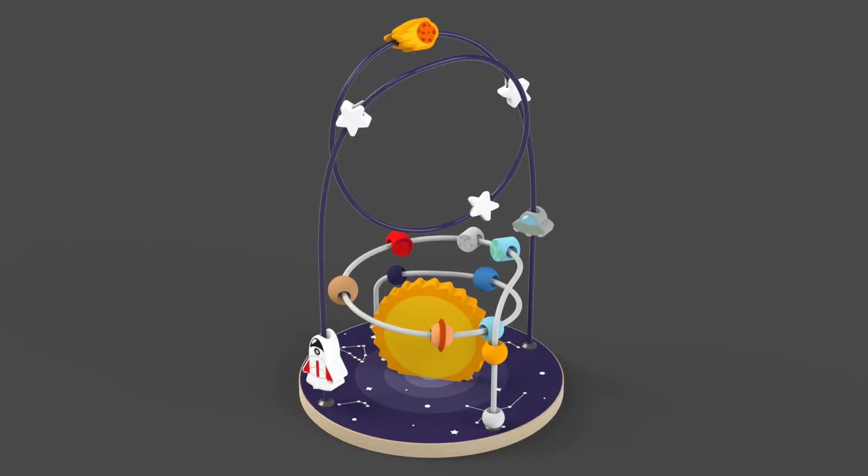In this video, we will be creating the first part of a space-themed wooden bead maze toy. You will be able to download the decals and the DXF files I am using in this tutorial from the description below. You could also design your own in a vector-based program or use imagery from the internet.

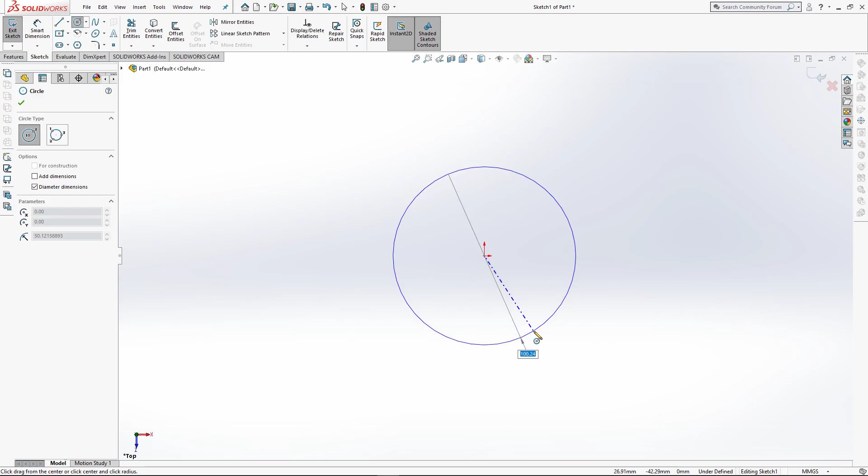To begin, click New and Part. Starting with the base, I extrude a 200mm circle to 12mm thick on the top plane. Then fillet the top and bottom faces by 1mm.

Now I'm going to start a sketch onto the top face of the extrusion. Using the centre square tool, I give myself 4 equal guide points. I then select the whole sketch and tick the For construction box, as I only want to use this sketch as a guide. Using the guide sketch, I draw 4 equal circles.

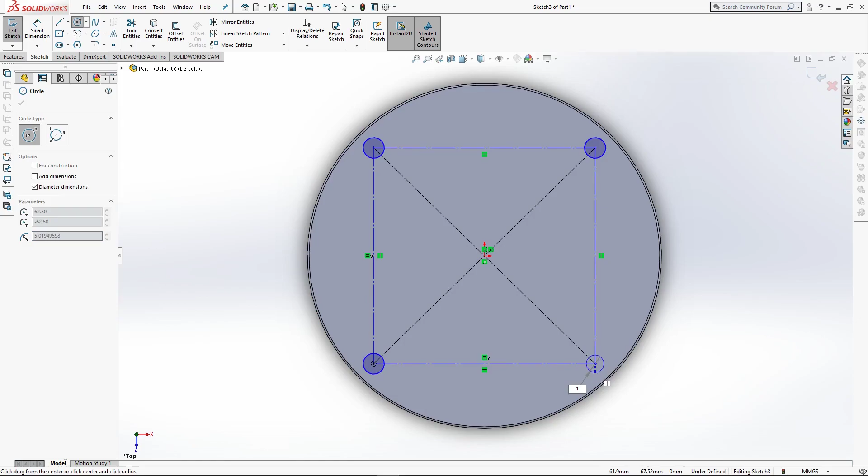I then want to extrude these to 3mm, unticking the merge result as I want these parts to be separate. I then want to chamfer each edge by 2mm at a 50-degree angle. I do this to all parts.

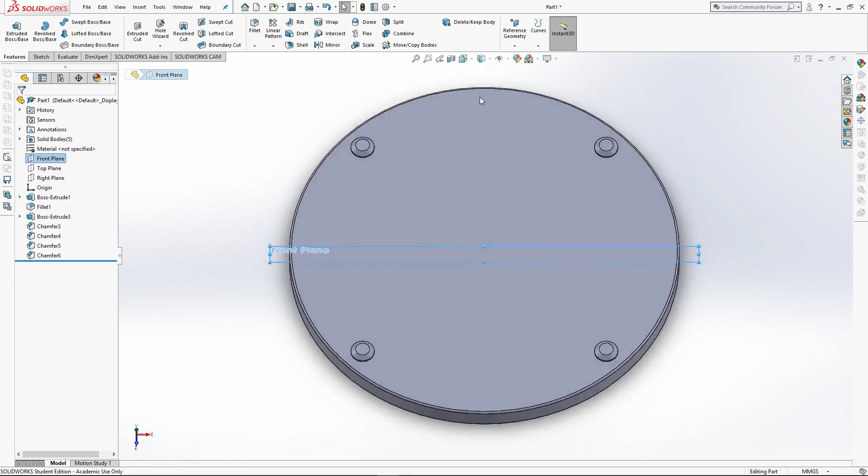I now want to import the DXF file for the sun, which will go in the centre of my bead maze. To do this, we click on the plane that we want to import the DXF onto. We then click Insert, DXF. From here, you want to select the DXF file and click Open. A dialog box will appear here.

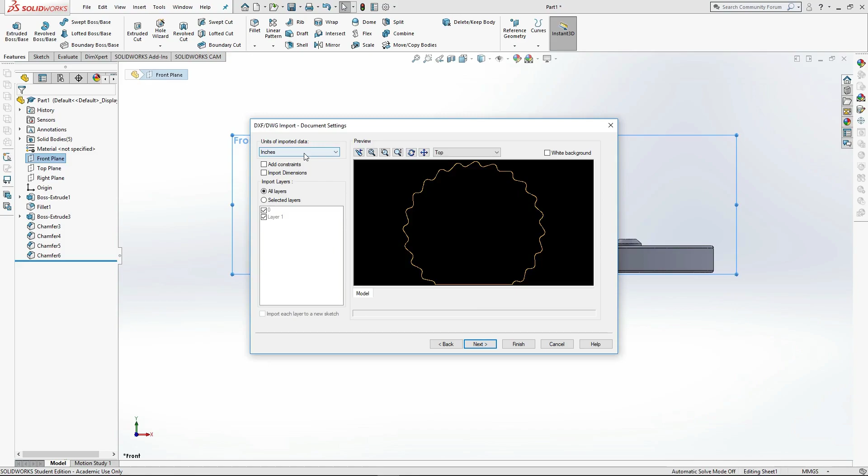You then want to click on the next button, where you will see a preview of your DXF in the black box. Using the drop-down menu, you need to select the units in which you want to import your DXF file. This will depend on what you exported your DXF file in. For me, I always use millimeters, so I just click that. I can then click Finish.

The DXF will then come in as a sketch, which you can then move entities into place. From here, I extrude the sketch mid-plane so that it remains center of my model. I then untick Merge Result so that it remains a separate body.

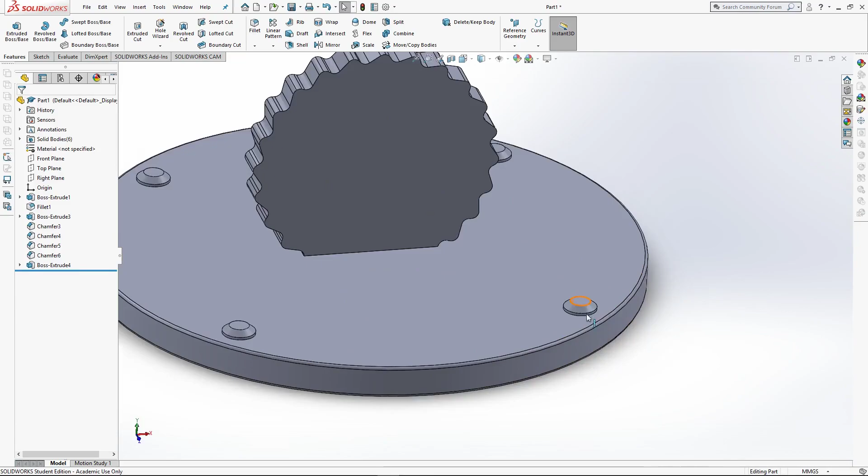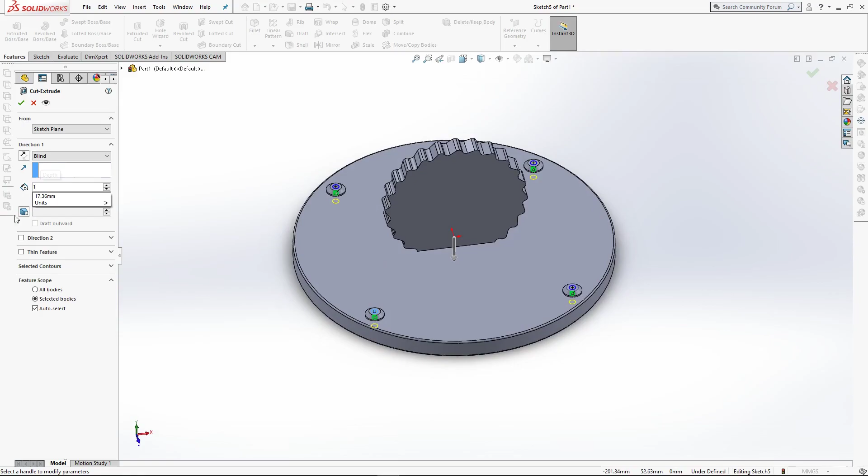Now I'm going to cut the holes into the maze stoppers, ready for the wires. Sketching onto the top face of the stoppers, draw 4mm circles for the thickness of the maze wires. Make sure to tick Cut through all bodies, as the wires will need to go through the base too.

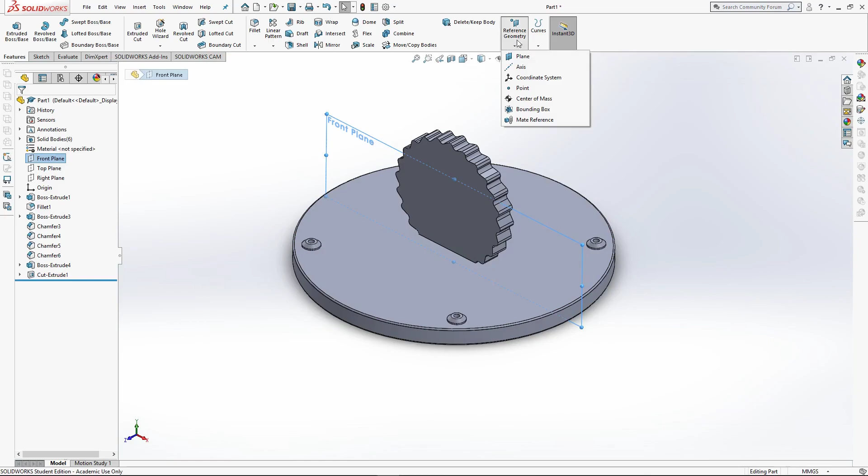Now we are ready to start on the wires. I will begin with the largest loop. For this, I need to add a new plane that crosses through 2 diagonal stoppers. To add a new plane, click onto your front plane, then Reference Geometry up on the top bar, Plane, and the options box will appear on the left.

Here you will need a second reference. This should be your right plane, which I can select from the Features tree. I then tick Flip Offset and click on the green tick.

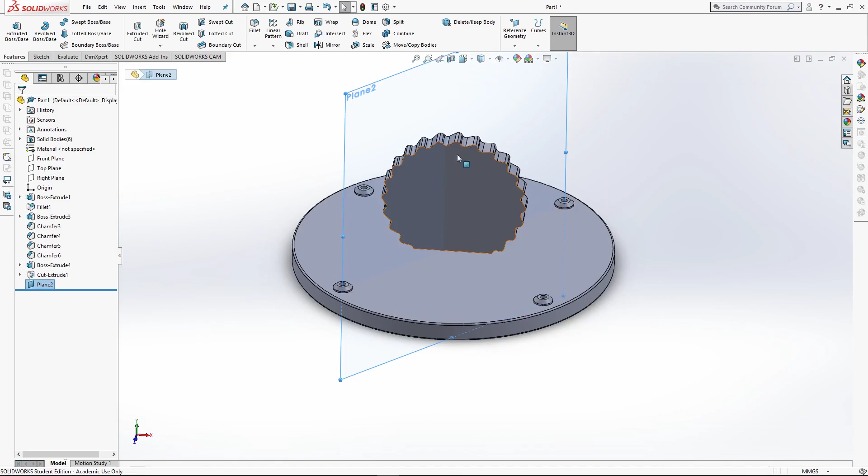Using our new plane, we will start the guides for our wires. So take the centerline sketch tool and draw from the midpoint of each extruded circle up in a vertical line at 120mm each. These are our starting points.

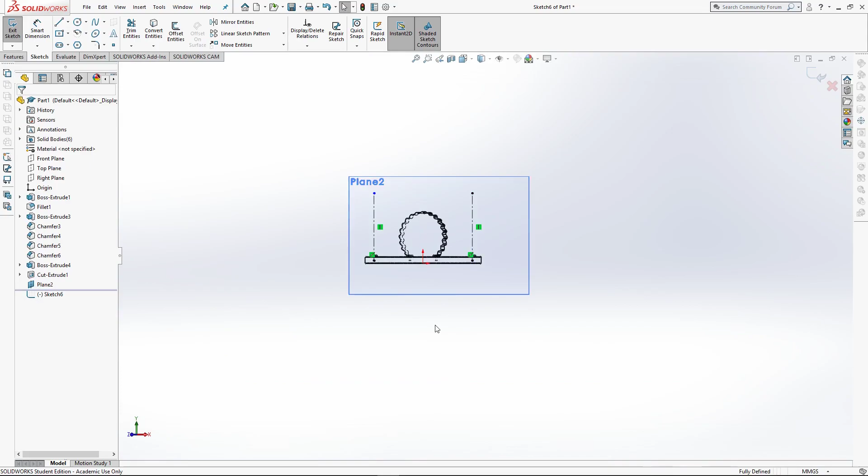Now I need to prepare my model for a helix. To do this, I need a new plane, spaced 30mm away from our plane 2. We need to draw a circle guide for our helix. I center my sketch between my previous sketches with a 205mm vertical center line. Using the center line, I draw a 140mm circle.

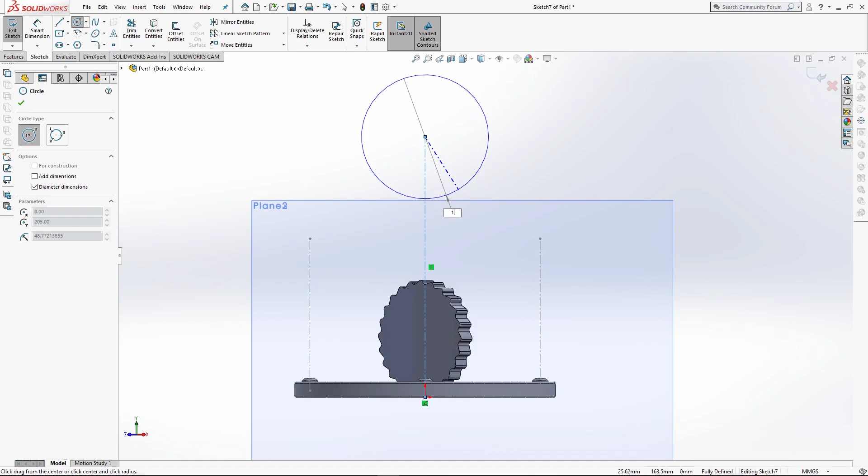I can now create a helix. You can start the helix with your circle sketch open or closed. I just prefer to close it. In the Features toolbar, select the Curves drop-down menu and select Helix and Spiral, then select the circle sketch we just made. The tool options appear on the left, and a preview of your helix becomes visible.

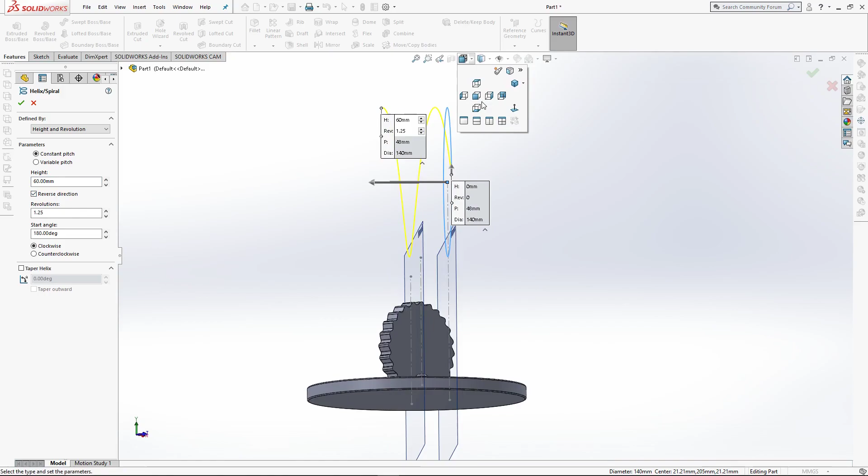Change the height of the helix to 60mm and reverse the direction so the helix becomes center to the model. Change the start angle to 180 degrees and the revolutions to 1.25, keeping the helix running clockwise so that it starts and ends at the top. Click the green tick to finish.

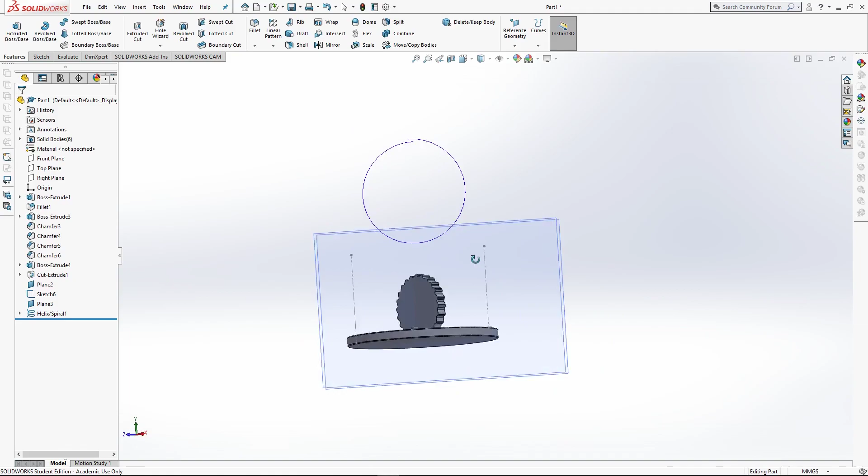I now need to connect my sketches up, so here I use the 3D sketch tool found in the sketch drop-down menu, selecting the spline tool. I join up my helix to the adjacent centre lines. I then need to play around with the splines to create a smooth wire path.

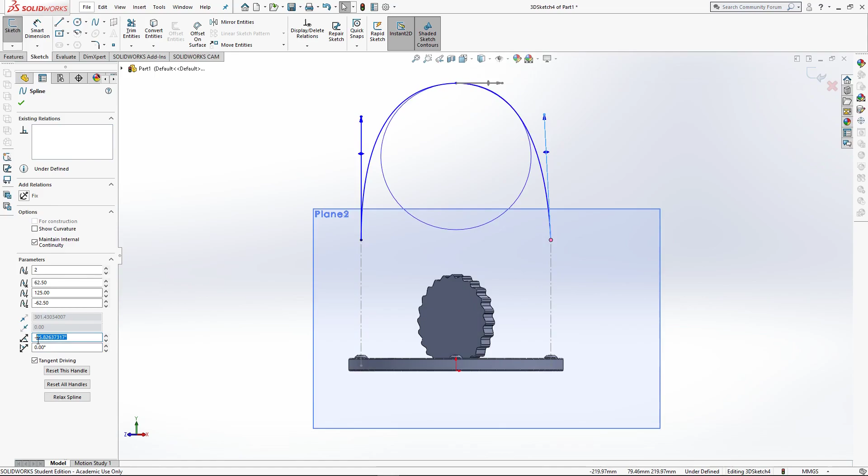Click on the points at the end of the splines to use the spline handles. Use these to drag the spline into place. You will also need to input the angle of the point in the left side menu. For the bottom angle, I put 0 degrees and minus 90 degrees for the top angle. This ensures our spline begins vertical. Now do the same for the other spline.

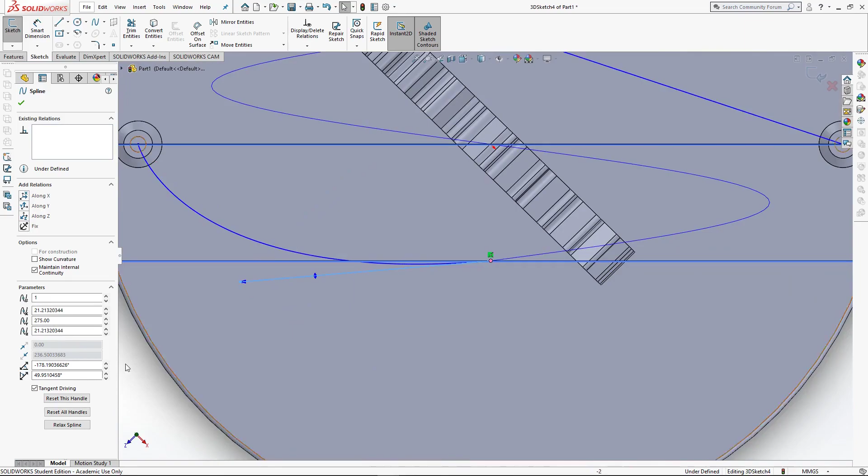Looking from the top of the model, I can see that the spline sketch doesn't line up with the helix. So again, with the spline handles, drag and pull the spline until you are happy with the path. Do this for both sides.

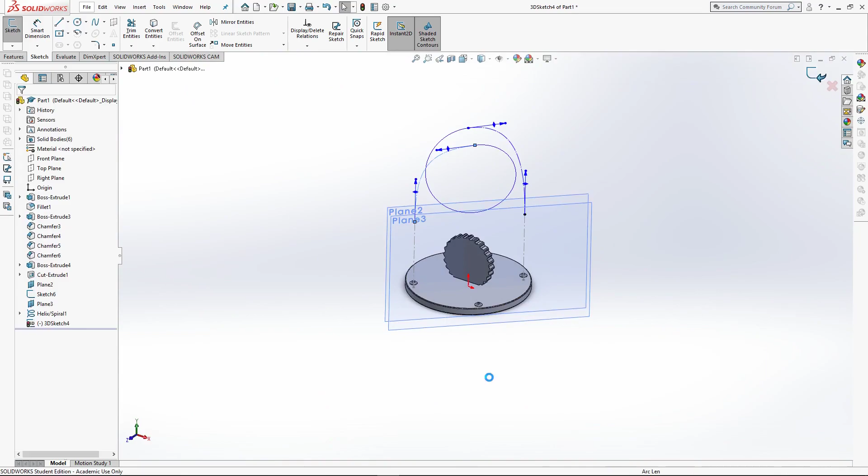Once I am happy with the sketch, I convert both lines to construction lines. We now have a path guide in which to create a continuous 3D sketch.

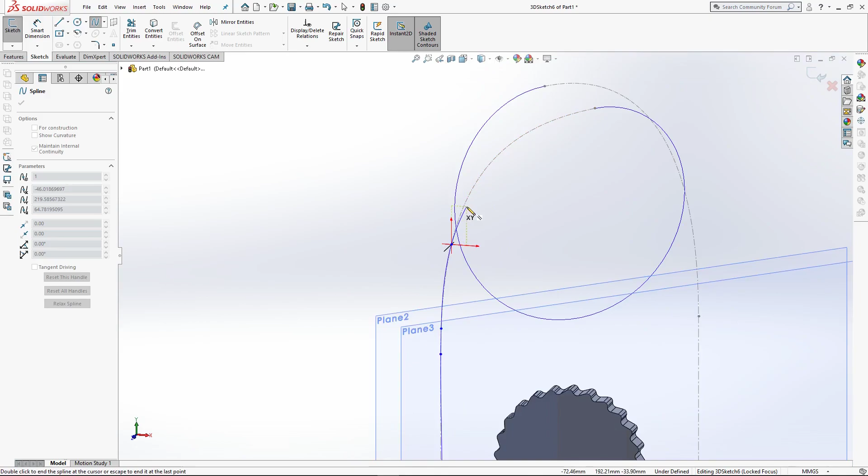Select 3D sketch from the drop-down menu and use the spline tool to trace over your guide path. Keep this spline continuous. It doesn't matter how many points you add around the curve, this will just make your path more accurate.

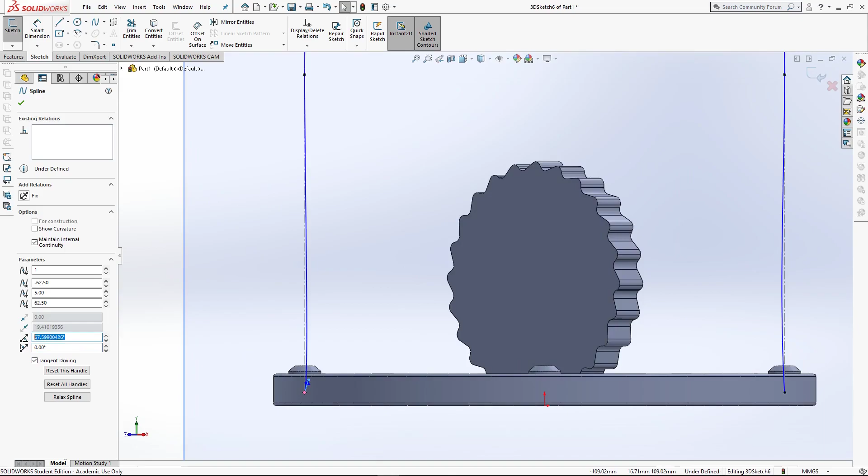Once your spline is finished, straighten out the start and end splines using the handles and inputting the angles in the options menu. By dragging the spline handles down and making them shorter, you make the spline straighter. Do this for both sides.

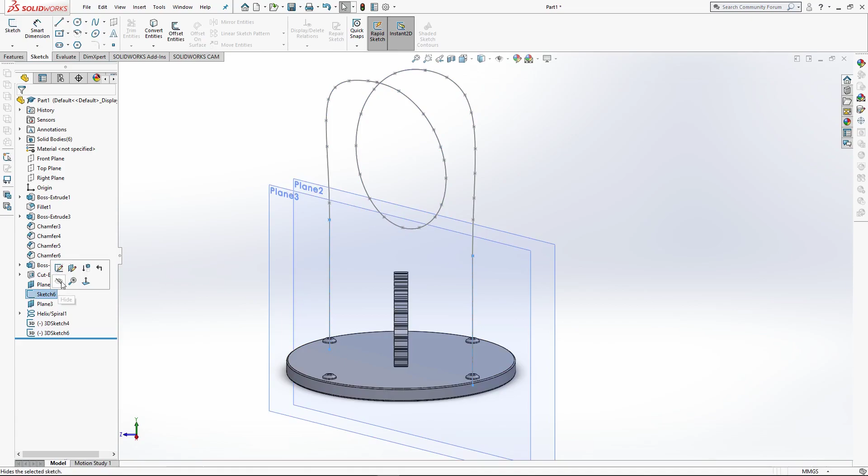Look at the model from different views to make sure the splines are straight from all angles. To make my 3D sketch easier to use, I am hiding the guide sketches.

I now want to create a sweep along my path. To do this, we need to create the profile. Sketching onto the face of the cut extrusion, I convert the entities, creating a 4mm circle.

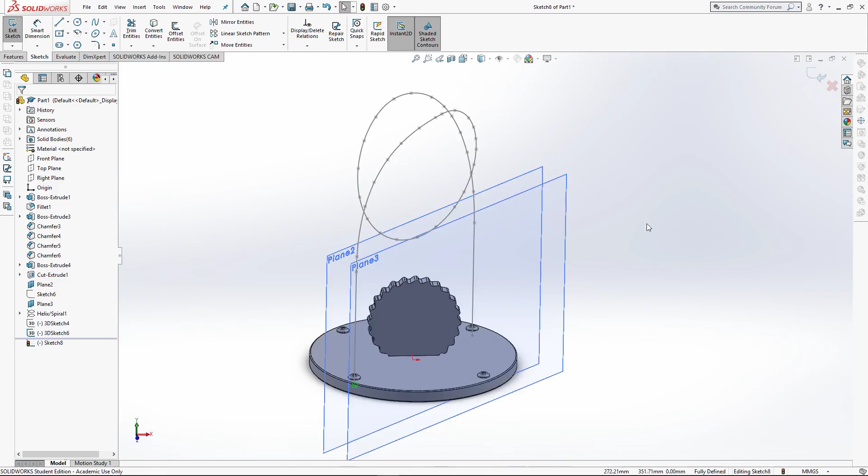We can now go to the Features toolbar and select Sweep. You need to select your profile and then the path. Because I want the sweep to be a separate body, you need to untick the Merge Result box. You then click the green arrow to confirm the feature.

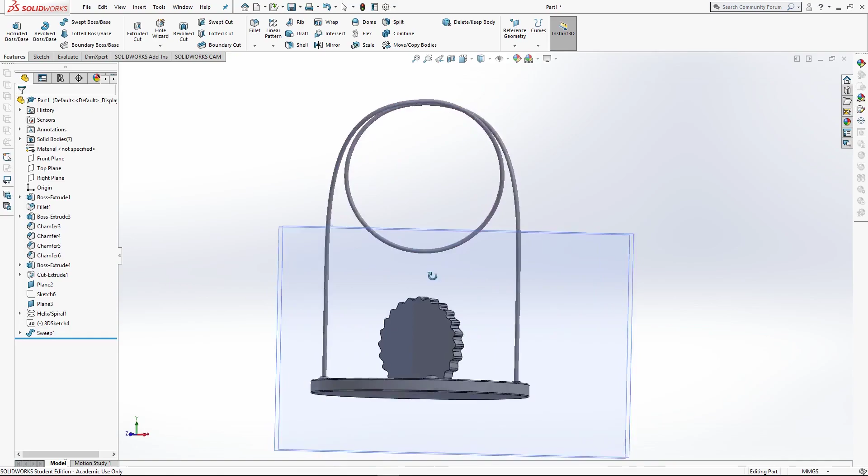Moving on to the second bead wire, I will hide these planes and create a new plane, the same as before, by selecting the front plane, reference geometry, plane, and using the right plane as my second reference so that it centers through the two other maze ends.

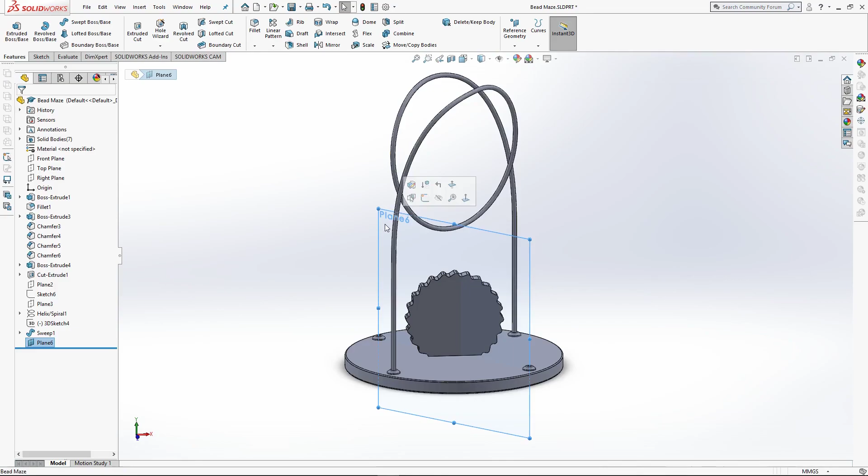Same as before, we need to sketch our guides from the centre of each cut extrusion. This time, the left sketch is 40mm and the right sketch is 75mm.

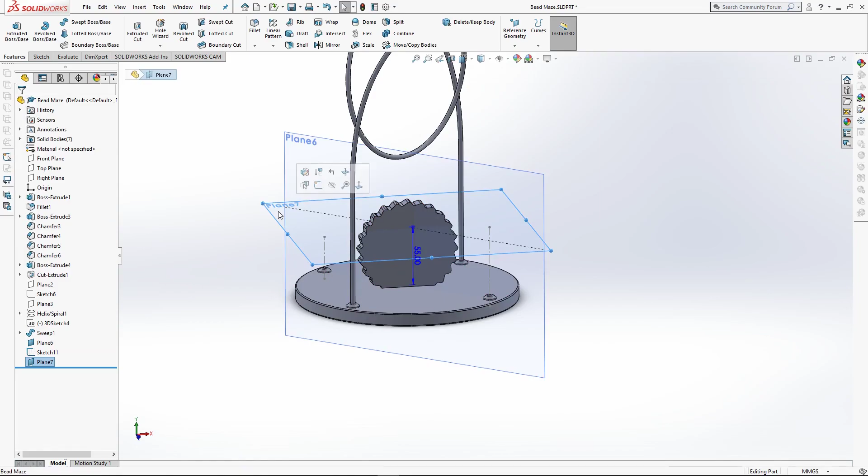Now we need a helix. Selecting the face of the base extrusion, reference geometry, and new plane, position the new plane 55mm above it. On my new plane, I draw a 130mm circle ready for the helix.

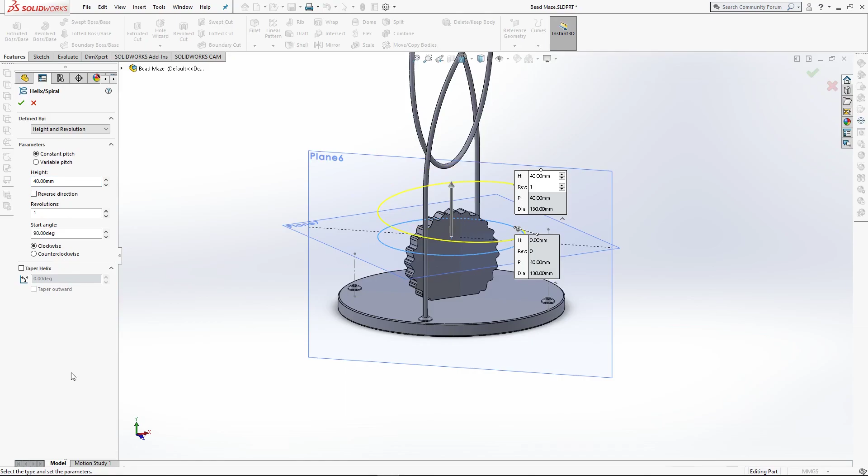As before, select Curves on the Features toolbar, Helix and Spiral, and the Options box will appear. For this helix, I want it to be 40mm in height, 1.25 revolutions, and a start angle of 180 degrees.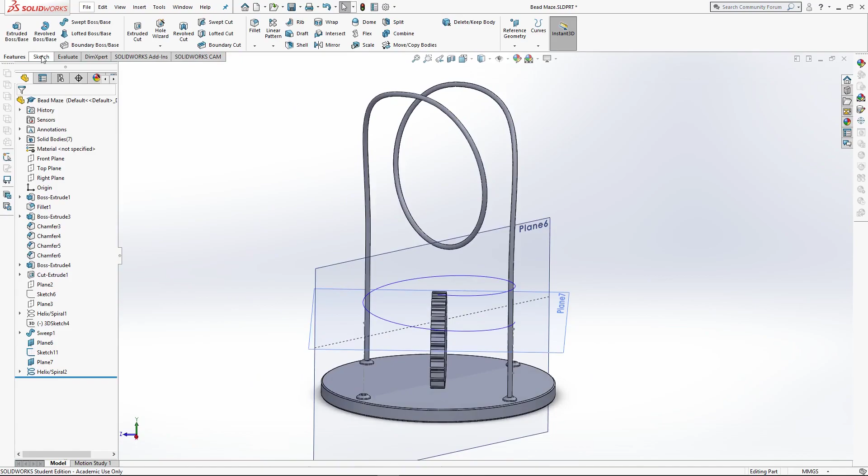These points will then need joining with the 3D sketch. Using the 3D sketch tool and the spline, I join up the helix to the guides.

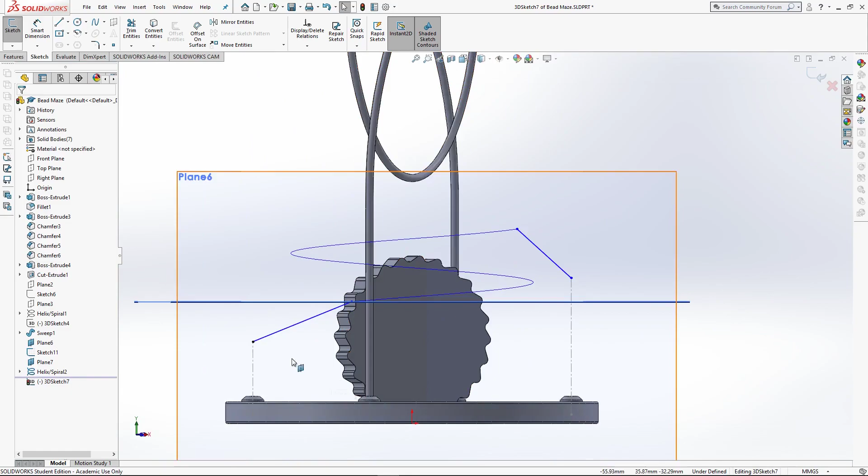Like before, the splines need manipulating into place to create the right curves for the maze wire. The best method for this is to use the spline handles to drag into place and then manually input the angles for the spline point.

To match the vertical guideline path below, I put 0 degrees for the bottom angle and minus 90 degrees for the top. I do the same for the other side.

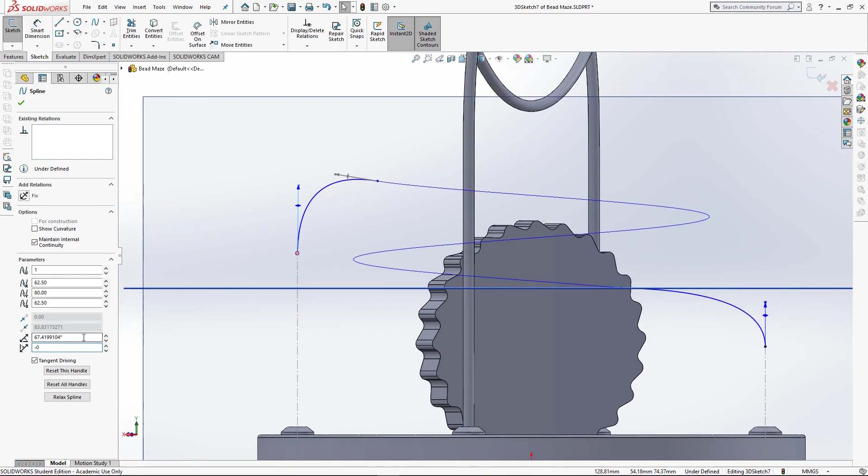The next spline handle is done by eye. Viewing the spline handle from several angles, the top view shows the path running in a smooth spiral.

Once I'm happy with the sketch, I convert the splines for construction. Using the 3D Sketch Spline tool, I need to trace over the guide sketches as I did with my previous maze path.

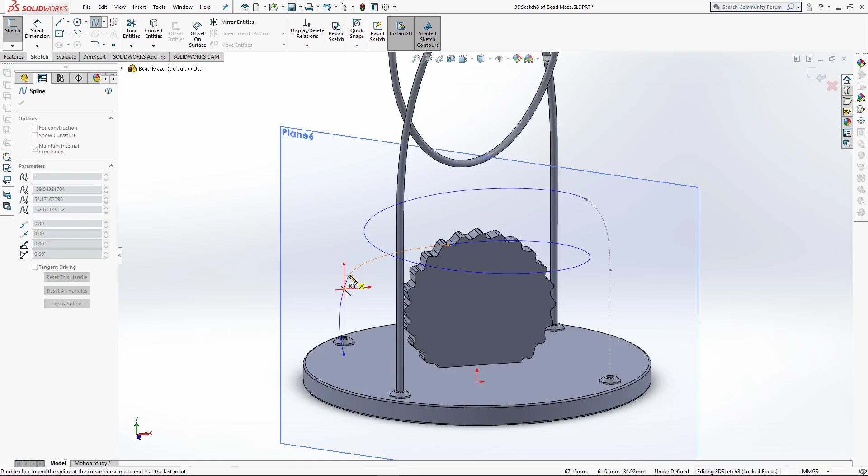The more points I add along the curve, the more accurate the trace will be. When you reach the straight guide sketches, only click the spline to the top and the bottom points. This makes it easier to manipulate afterwards.

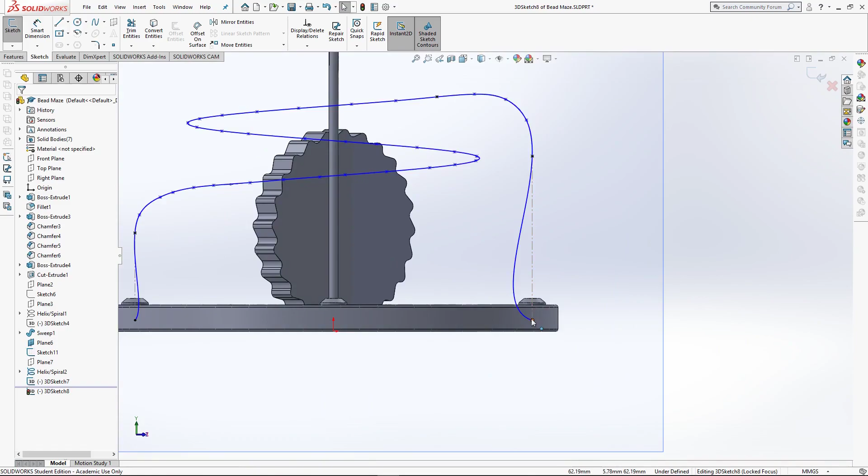Once your spline is finished, straighten out the start and end splines using the handles and inputting the angles in the options menu.

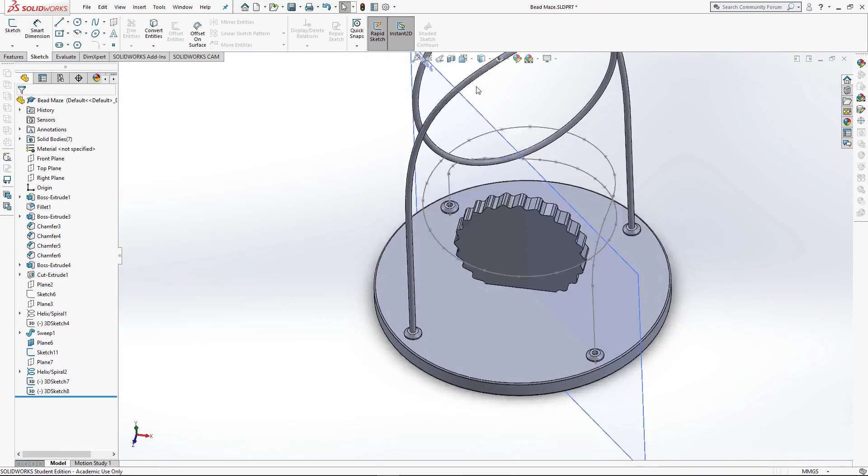Once more, create a sketch onto the cut extrude face, convert entities, and open the sweep feature. This time, I have left my guide sketches visible. By doing this, you can select the wrong path as highlighted here.

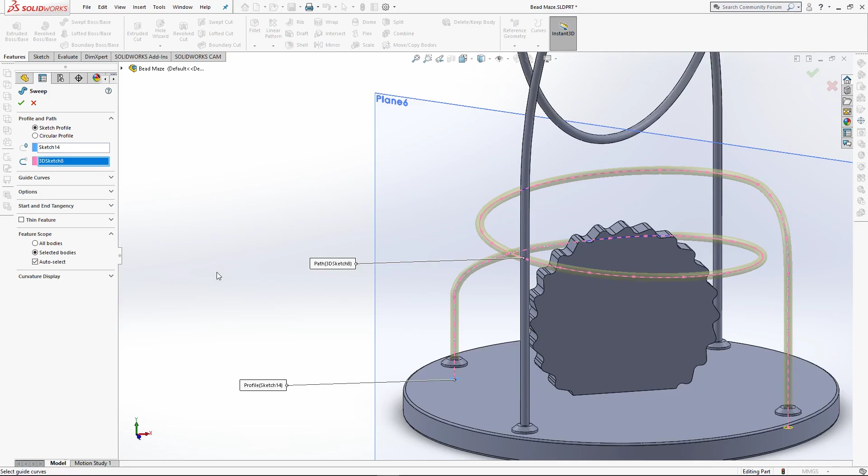So I select the orange path that you can see runs from start to finish. Select the path. Unmerge the result and confirm the feature.

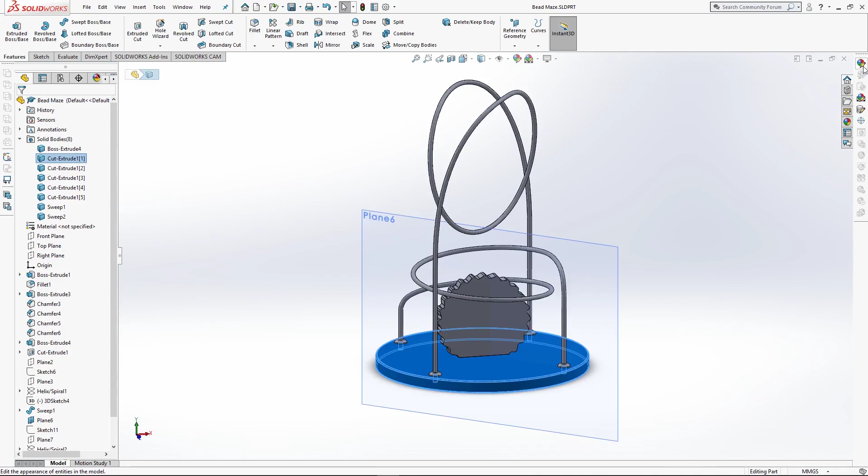With this component of the bead maze complete, I just need to add the appearances and decals. Using the solid bodies drop-down menu in the feature tree, I select the bodies that I want to add an appearance to. Starting with the base, I click onto Edit Appearance on the right side toolbar.

And select Polished Ash. I change the mapping of the appearance to projected and shrink the wood grain to look like a piece of plywood.

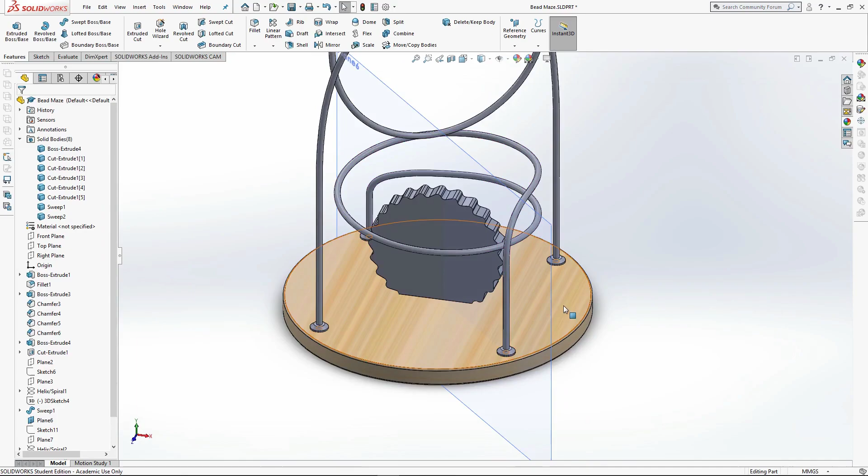The top of the base doesn't look right, but I'm going to add a decal here. Selecting the face and the Edit Decal icon here, I can browse for my decals.

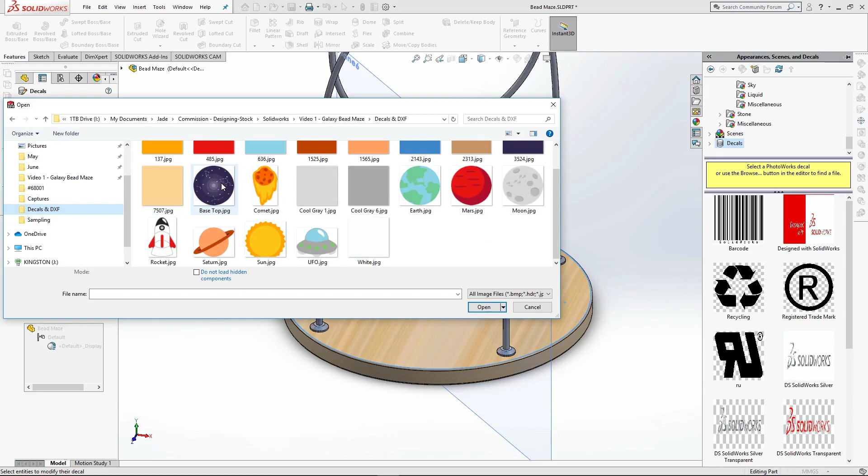I create my decals in vector software and export them as JPEGs. Useful tip: ensure decals are exported in RGB over CMYK. You can do this in your colour settings. This will give you the most accurate colours in your renderings.

Selecting my decal, it automatically fits to size, but if you go into mapping, ensure it is fit to width and height by clicking in the boxes.

Next, I select the large sweep and select Edit Appearance. Here, I want to use medium gloss plastic.

If you want more colour options, double click into the white eyedropper box. Here, you can manually input the exact colour you need. I want it to match the base, so just type the values into the RGB boxes and select OK.

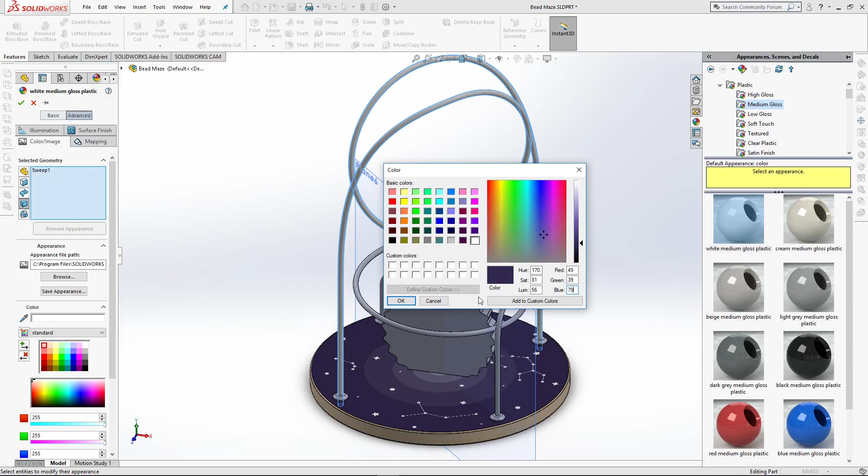For the second sweep, I want to keep it a medium white gloss plastic. I want to make all the maze ends glossy rubber, just like the real toy.

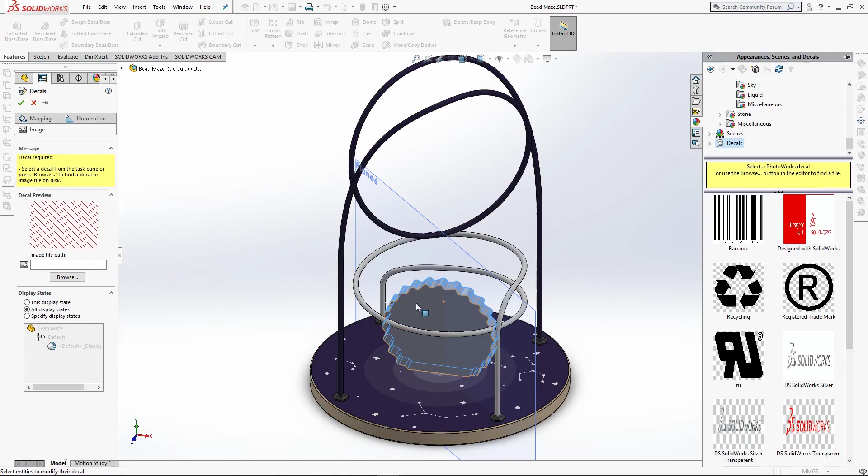Finally, I need to add the decals to the sun. Starting with the main colour of the body, I project the decal, ensuring it covers the whole sun by dragging on the decal window. Then, selecting the face of the sun and Edit Decal, I can add the face artwork.

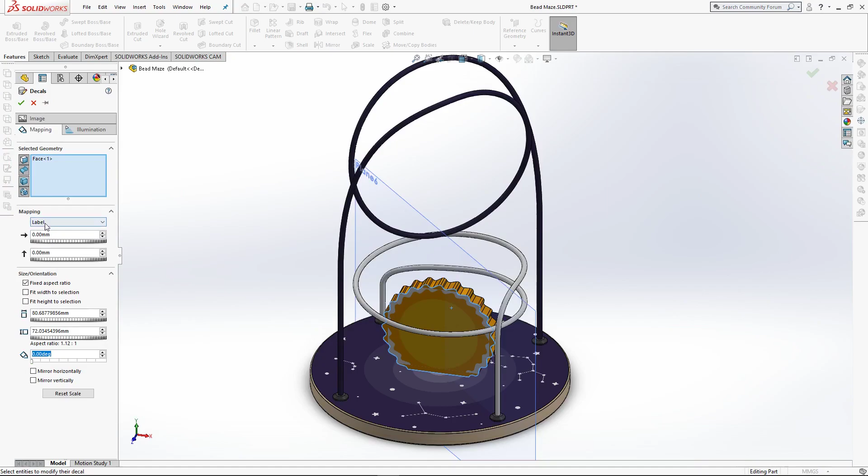However, this time I want the decal to be on two faces. To do this, click on Mapping and in the drop-down menu, select Projection. Click into the selected geometry box and select the back face of the sun, ensuring the decal covers the body fully.

Now our model is ready for the second video segment, where I will show you how to create parts to add to the bead maze in a fun interactive assembly. Thank you for watching.